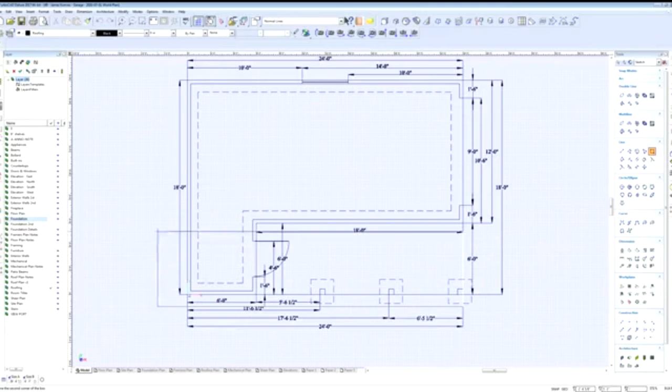Now I know that my walls, well, maybe I don't know. Let's see, let's bring back the foundation. What's my distance here? 18 feet. So I'm going to add a foot to either side, so 20 total. That's what I wanted. I thought it was 24, but then I realized that was the other wall.

All right, so I'm going to come up here now. My rafter is going to be 1.5 inches thick, because it's probably going to be a 2 by 10 or a 2 by 12 if I can help it. So I'm going to assume that.

So I'm going to press tab, and the first one here is going to be 1.5 inches, and then I'm going to tap again, and it's going to be 20 feet. And click enter. All right, so there we go. There's my first rafter.

Now I'm going to highlight that line by dragging from left to right. So that means that only things that are fully encompassed in my square will highlight, so that I can know that I'm deleting just that line. Now I get my guideline out of the way. If I went from right to left, it would have been green, which would have highlighted a bunch of stuff. All right, so now we're just going to highlight this box.

We're going to move it 2 feet over to the left, so it's 2 foot on center, and we're going to copy it at the same time. So we use this copy tool right here, and the Delta X tool right here, and we're going to say negative 24 inches, enter.

So there we go, second rafter. Now I'm going to do it again, but highlight both and move it over 48 inches, or 4 feet. Oh, I made a mistake - I accidentally moved it forward instead of backwards. So I'm going to undo my copy and move it backwards 8 feet to make up the difference. There we go, now we're back on track.

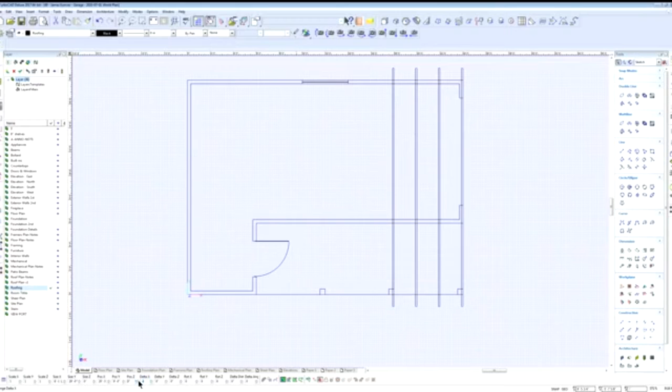Now again, I'm going to highlight more than one to speed up the process here. I'm going to click the copy button, negative 8 feet. Boom. Now if I did it again, it would be 16 and come over the edge. So let's see, 8 - this is 2, 4, 6, 8, 10, 12. So I need one pass, so I need 2 less. Okay, hopefully you caught up with that. So this is 10, so negative 10.

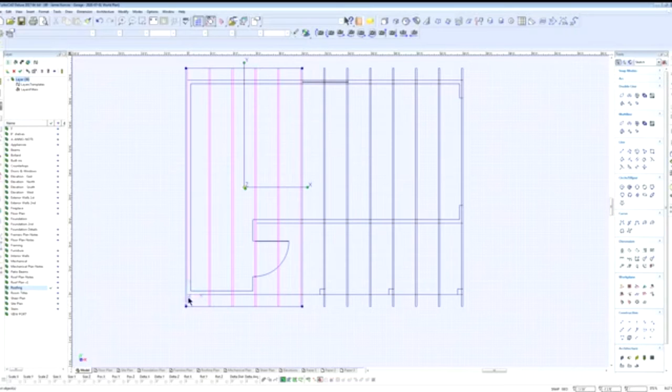Boom, okay great. Now notice this last one is 1.5 inches off, so I need to move it back that way 1.5 inches. That last one's always going to be off because of the thickness of the rafters. There we go.

Now you're also going to want an overhang on the front and the back, so we're going to do that too. I'm going to take this and copy it, move it back a foot, negative 1 foot, and take the front one here and move it forward a foot, plus 1 foot. There we go. Now there's your rafters, or trusses if you're going to use trusses.

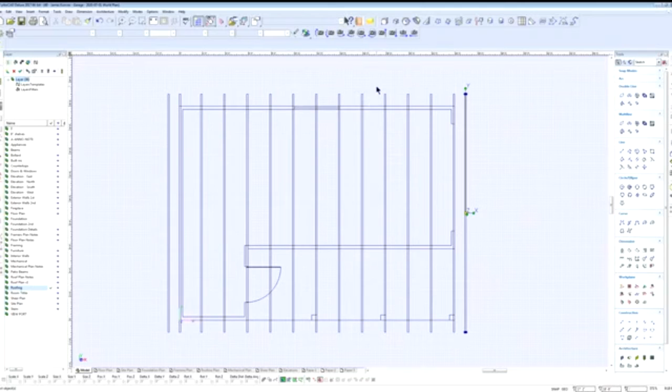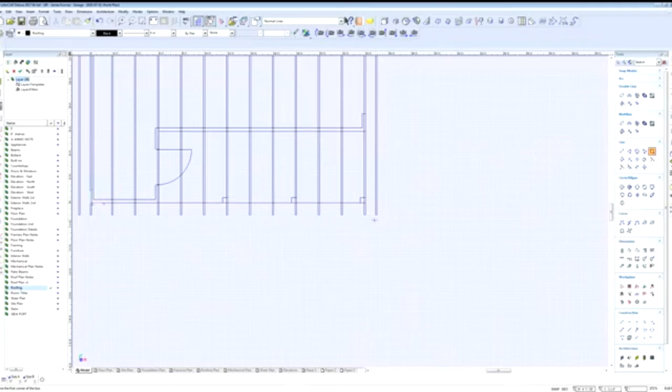And we're going to put the fascia board here on the side. So again, we're going to take this rectangle, go to the vertex here, and it's 24 feet plus the extra foot plus the up and down then is 1.5 inches. So we're going to tab 26 feet, tab again 1.5 inches. There we go, and here's the fascia on this side again. Click on that with a V, come down here, tab 26 feet, 1.5 inches, enter. Okay, great.

Now this one here - if you're using trusses, the center would be your roof peak, and you want to indicate that on the plan. However, with this plan, he's going to use this wall as a support wall to support the roof rafters, and just come straight down on both sides. So then we want to put the beams in here again, because he's going to have a beam across there, and this wall is going to be, I think, 12 feet if I did the math right.

So what I did is I made sure that this is a 4-12 pitch right here. That means it's up 4 inches for every 12 inches across, and that means this wall has to be 12 feet tall to go down 4 feet to get to here at 8 feet. All right, and we're just going to set the rafter right on top of those walls. Okay, and then we'll match the rafter here and have it set on top of there. So then the peak is going to be right in the center of this wall, so we're going to draw a line right in the center of this wall.

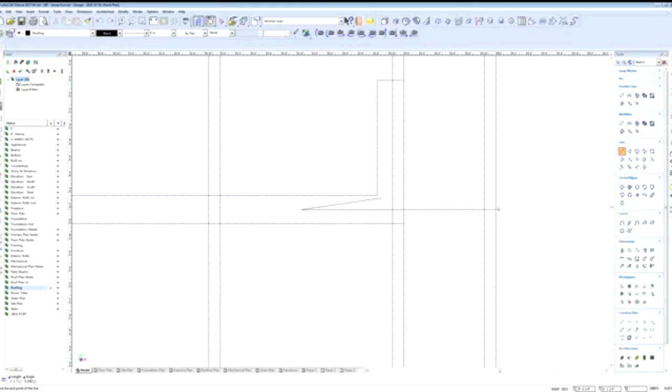Let's see, 3.5 inches, so it's going to be 1.75. All right, we're just going to start here and come across, and I'm going to put it here. No, I didn't want to do that. Oh well, we're good, I'm just going to start here. This way I'll erase that line in a second, but it helps me as a guide to know where I'm supposed to be.

So these are 1/2 inches here, and I need to be 3/4, so I'm going to put myself right in between there. Now I'm going to come across all the way to the other side. Boom, there we go. Now I'm just going to try to float over this line as best I can, and then change my angle to 180 and make sure I'm right. Should be 26 feet and 180 degrees. Enter. There we go, so that is the roof peak. Right click on this little line, get rid of it.

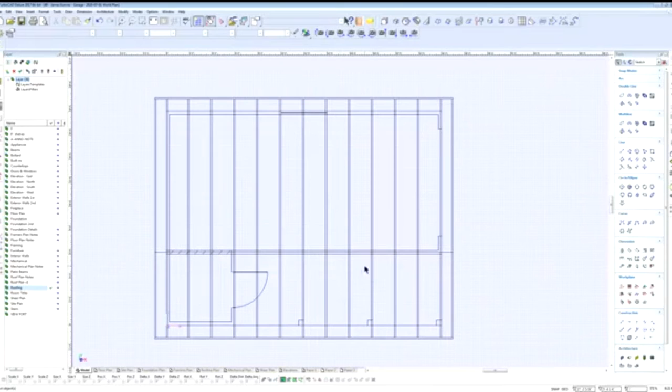Alright, so there we go, pretty straightforward. Now you do need a couple dimensions on this, so we're going to use our guidelines again to show how far the awnings are. Notice I started with a V to get this out, and then I double checked by tabbing to make sure the degrees angle was 0.

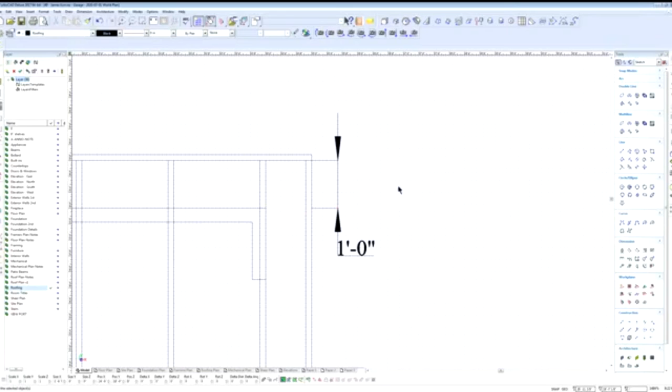Now I'm going to use my dimension tool. I'm going to come down to roofing and start out here. I'm going to use V for the end - I'm actually going to do right here because I want to show the eave distance, not the fascia distance. And I'm going to press I here for intersect. 1 foot, there we go. Now this line needs to go away, so I'll get rid of that. And I could - well, maybe I could have left it. Let's leave it. Control Z to undo that.

Alright, I also want to show where the roof peak is from both sides, so let's do that. Get my dimensions again, go to the V, get this one.

There we go, V for the vertex. Come out. Should be, yep, and a quarter in there, yep. It is, we're good.

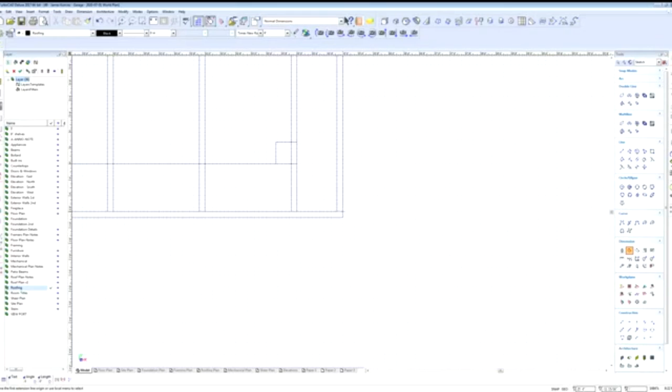I for intersect. Oh, what happened? The line is very crooked. It shouldn't be so crooked. Oh, okay, it got that intersect instead of this intersect, so let's delete that one.

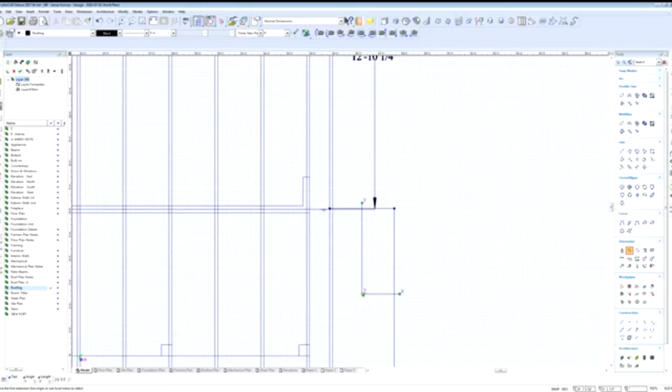Start over. Zoom in a little bit. Let's get the edge of that. We just get the end of that. V, there we go. And just get the end of this. V. Oh, darn it, I clicked too fast. I am getting in a hurry. So again, it's saving, we got this little hourglass. Wait till that's gone, Control Z to undo.

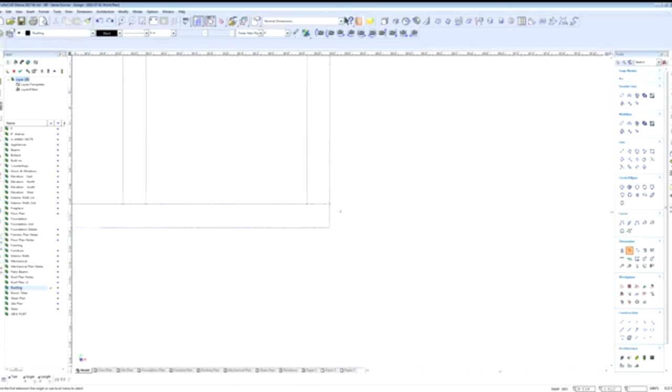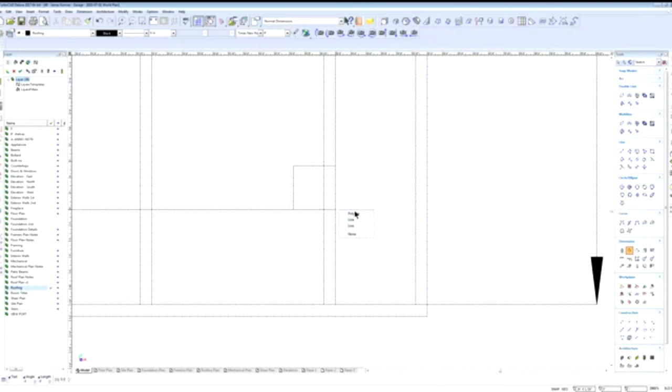Let's go back, let's try one more time. V. And up we go, and in we go, and V, and out. Line those up. Good. Now, you might want to do it from the edge of the wall as well. So we're going to do that here. And either of those is fine. Alright, there we go.

It's not super needed. Okay, so what we're also going to do is add a label, a roof peak, roof peak here. So we're going to, actually I'm going to steal the labels off my old plan. Here we go, roof peak. I'm just going to grab it.

And like I said, this is a plan that I've done. I've stolen the template as a template. So I just moved my old plan off to the side and started a new plan. It helps because I have all these details already templated and started. All my notes already started. All I have to do is redraw my plan.

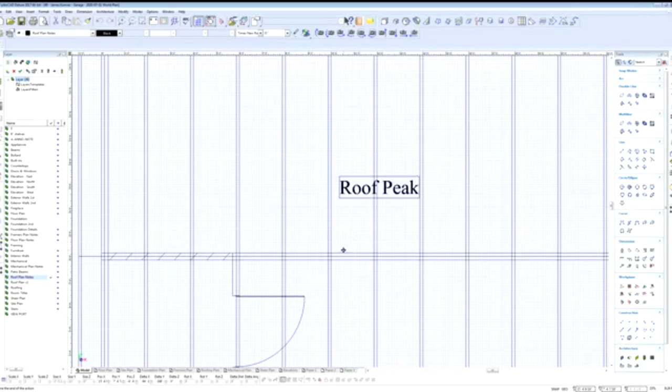Alright, so roof peak here. There we go. And alright, so what else is on here that we need? For some reason the mechanical's showing up, so I'm going to hide that just so it's not so noisy. Mechanical gone, there we go. Now notice this is a trussed garage, so we have right here an entrance into the roof from the ceiling, so an attic access. He also used bird blocking with holes for ventilation in the attic.

Now when you do a rafter plan, there's no attic space, so there's no venting needed. Okay, so we got that. So these are vents right here, we don't need those. Okay, good, so I think that's all we need.

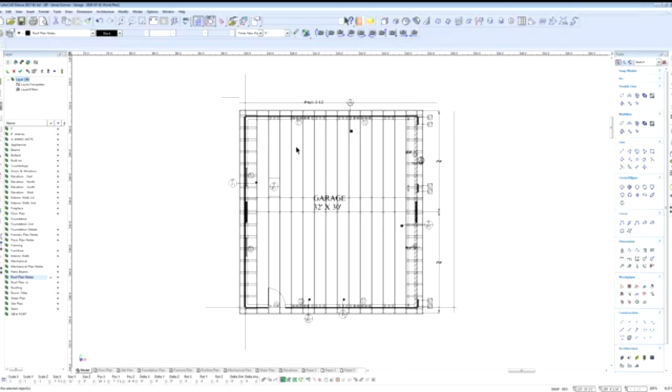I don't see anything else. Oh yeah, the pitch is on there. Let's copy that over there. Here we go, down we go, down we go.

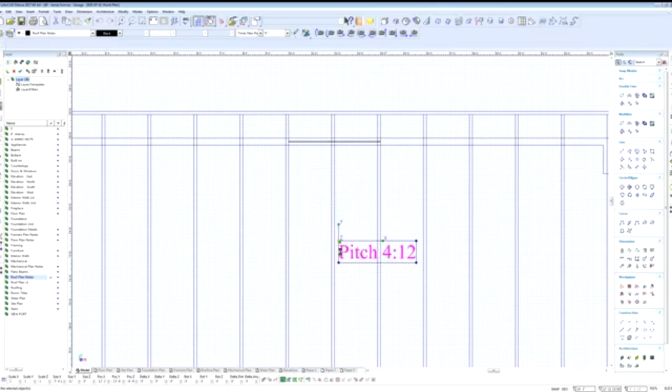All right, this side's supposed to be 4:12, so we're gonna put that on there. I didn't do the math on the other side, to be honest. So I'm just gonna copy that over there, and we will figure that one out later. I mean, the whole distance is 18 feet. This is 12 feet, this is 6 feet. So it's twice as steep.

So really, it's probably an 8:12 pitch, but that's just a guess. I'll have to verify that with some other math. So we're going up 4 feet, and we're going across 6 feet. Yeah, I need to convert that to inches though. So anyway, there you go.

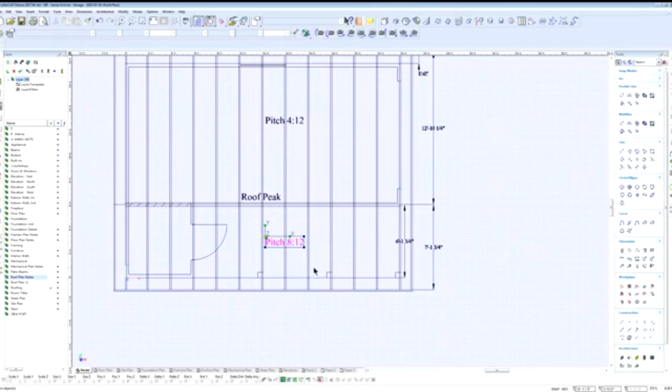All right, so I think we're done. We're going to go over the roof plan here, the sheet, see what we got. There we go, looks pretty good. We got some notes, I'll have to adjust these notes. I'll have to make sure that these are correct.

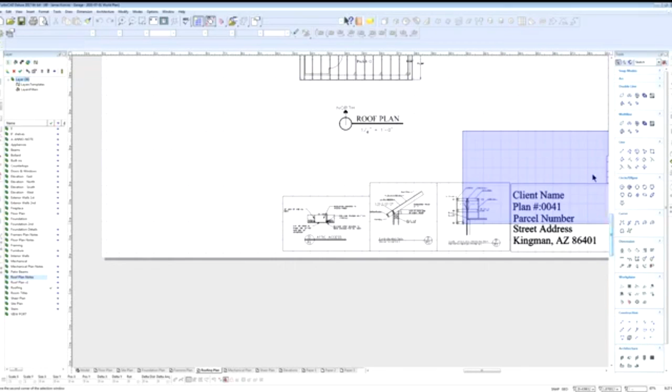I'm going to take this one out, the attic access one's not right, we don't need it. This one here. Oops, I don't need to do that. Let's see, up, up, up. All right, come on, work with me here.

All right, I'll definitely leave this one. I'll convert this one to trusses, or I mean rafters instead of trusses. So I'm going to take out the ceiling there. Good, good. All right, so again, I want to make this half scale because it's so small. So bring it up here.

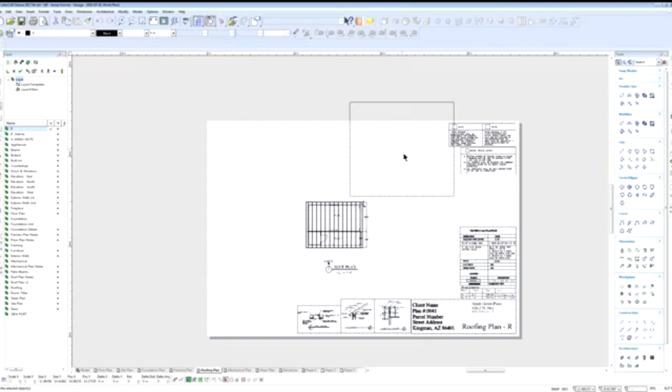Just right click on it, go to properties, go to viewport, go to fixed, change this to 24. And half scale means it's half inch equals a foot.

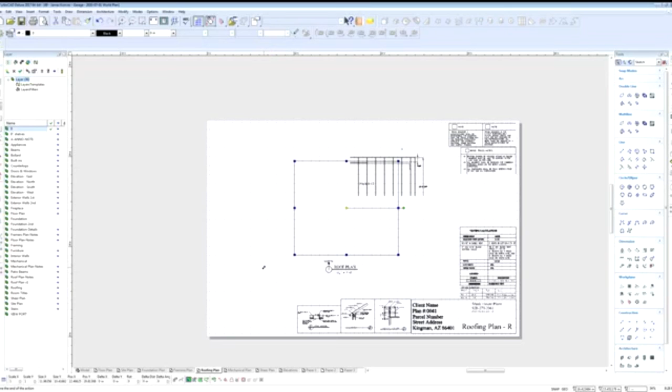Is there 2 here? I did, look, there's a copy right here, so I got 2 of them. Let's undo the copy. Now, if you have that copy tool, I often make copies of stuff on accident because I have that stupid copy tool highlighted. So don't feel bad, I'm still doing it. You'll probably do it too.

Alright, so there we go. There's our roof plan, pretty much done. We'll do a little touch-ups here and there. Okay, let's go back to the model space. Make sure I didn't copy anything else I didn't want to. Okay, we're good. Thank you for watching.